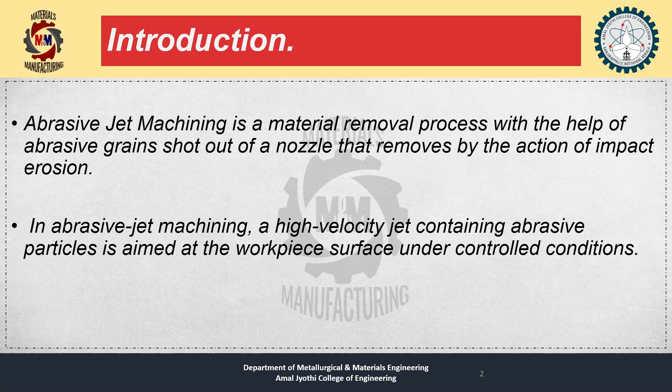What is abrasive jet machining? Basically, abrasive jet machining consists of shooting out abrasive particles at very high speeds at the surface we desire to carve, called the workpiece. It's a material removal process with the help of abrasive grains shot out of a nozzle that removes material by impact erosion. A high-velocity jet containing abrasive particles is aimed at the workpiece surface under controlled conditions. The environment is secured and closed so the spray doesn't go out of control, and the jet carves out the predefined shape we want.

The impact of the particles imparts a concentrated force performs operations to cut through the workpiece at speeds of 150 to 300 meters per second. The average speed at which particles hit the workpiece ranges from 150 to 300 meters per second, depending on the application used. The abrasive grits are carried in a high-velocity gas stream.

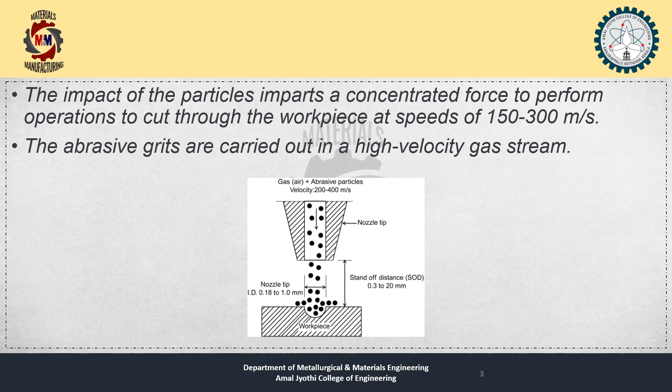To propel these particles through the jet, we use a gas stream, which I will talk about later in the components section. From the diagram here, you can see the nozzle tip shooting particles into the workpiece, and the particles have already made a semicircle-shaped dent on the workpiece.

Components of an abrasive jet machine: We have a gas supply, used to shoot out these particles and propel them at high speeds. A filter, used to make sure the fuel is completely clean. A pressure gauge, to monitor the pressure at which the gas propels the particles out. A mixing chamber, where the grits or supply we're injecting get mixed before being shot at the workpiece. A nozzle, where the grits come out directly. And an abrasive, the material we put into the machine.

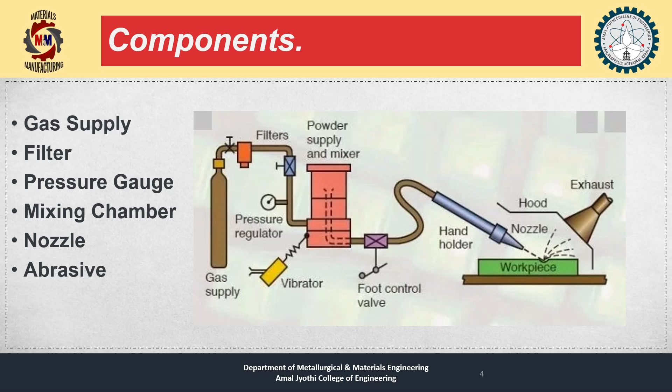Gas supply: this can be either nitrogen or carbon dioxide, and it's used to propel the particles out. A mixture of the gas and abrasive particles is aimed at the workpiece under controlled conditions, meaning the environment is closed with no chance for particles to escape. The gas is shot out at a pressure of around 2 to 8 kilopascals.

The filter is used to clean the fuel supply so that dirt or other impurities do not hamper the progress of the process. We want the process to be as neat as possible with minimal impurities so that it's more efficient.

The pressure gauge is used to control the pressure of the compressed gas used in abrasive jet machining, as the pressure decides the depth of cutting and the amount of force required for cutting. A tougher particle would require more force, and we can regulate this using a pressure gauge.

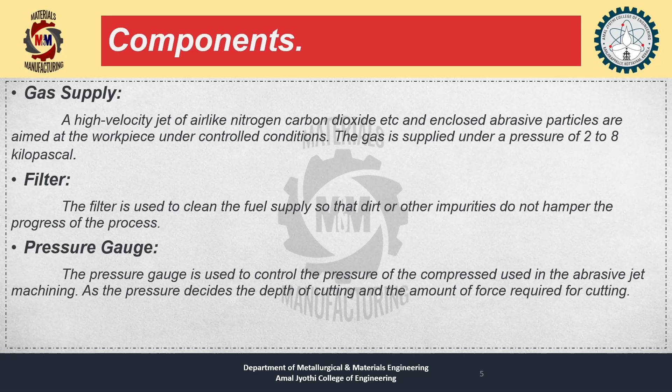Mixing chamber: the abrasive powder is fed in, and with the help of a vibrator, the amount of abrasives can be controlled. We want the abrasives and gas to mix thoroughly in this chamber, and we assist this mixing process using an external vibrator.

Nozzle: a nozzle is used to increase the velocity of the jet. The velocity can be anywhere between 100 and 300 meters per second, as discussed earlier. The nozzle can be adjusted for the desired cutting angle. For example, if we have a rectangular piece and want to make a 45-degree angle across it, the nozzle would be adjusted before cutting so the abrasives are shot at that particular angle to achieve the desired end product.

The nozzle is usually made of tungsten carbide since it is subjected to a high degree of wear. The abrasives being shot out do a lot of damage to the nozzle, so the components used to build it have to be resistant to this kind of wear and able to withstand corrosion.

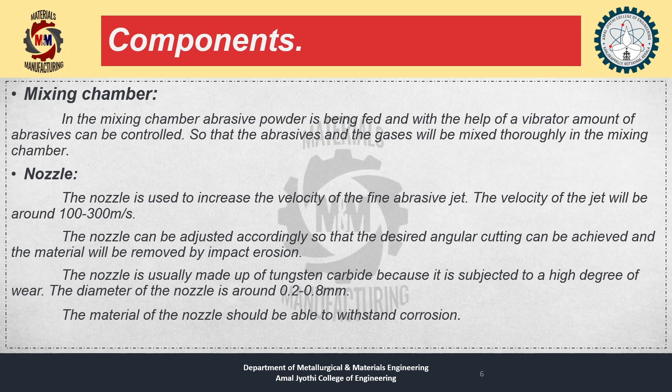Abrasives: the material we put into our abrasive jet machine to be shot out is basically divided into three main categories, which are aluminum oxide, silicon carbide, and glass beads.

The rate at which these abrasives can be fed is controlled by the vibration of the external vibrator we are connecting. The amplitude that it provides defines the feed rate of the abrasive powder.

The common particle sizes for these abrasives vary from 10 microns to 50 microns. Smaller sizes are used for better surface finish and precision work. More intricate patterns and details can be achieved using smaller pieces, while bigger pieces that do not require as much intricacy can be used for other purposes.

The feed rate of the abrasive powder is controlled by the amplitude of vibration of the mixing chamber. The external vibrator that we connect to the AJM, or abrasive jet machine, controls the feed rate of the abrasive powder that we have inserted into the machine. The gas pressure can be controlled using a pressure regulator.

There are three main categories of abrasives that we usually put into the machine. They are divided into aluminum oxide, silicon carbide, and glass beads.

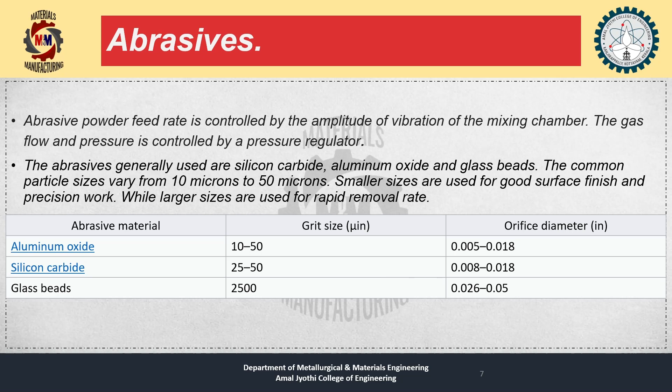The working principle of an abrasive jet machine involves the use of a high velocity stream of abrasive particles carried by high pressure gas through a nozzle onto the workpiece. The pressure energy of the stream is converted into kinetic energy, producing the high velocity stream.

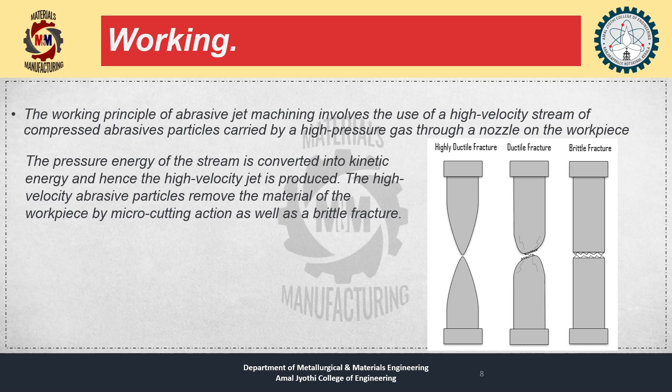These abrasive particles remove material from the workpiece by micro-cutting action as well as brittle fracture. We can observe different kinds of fractures, mostly two: highly ductile fracture and ductile fracture are quite similar to each other. Brittle fracture is not very clean and happens due to a rapid, quick movement, while ductile fractures tend to take more time and occur gradually. This also relates to yield, which is how ductile fractures occur, while brittle fractures are what we are causing here with these abrasive particles.

We can watch a live demonstration of the AJM in this video, and I'll be showing it to you right now.

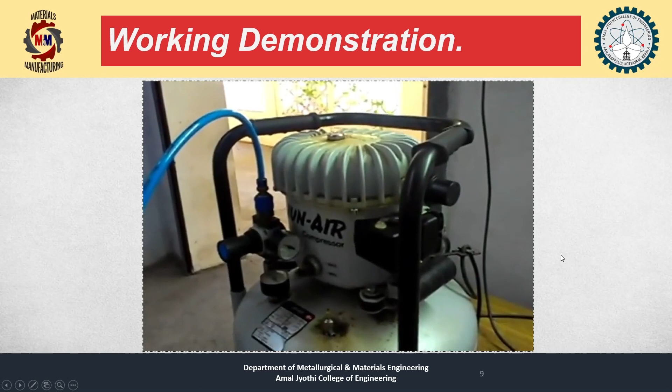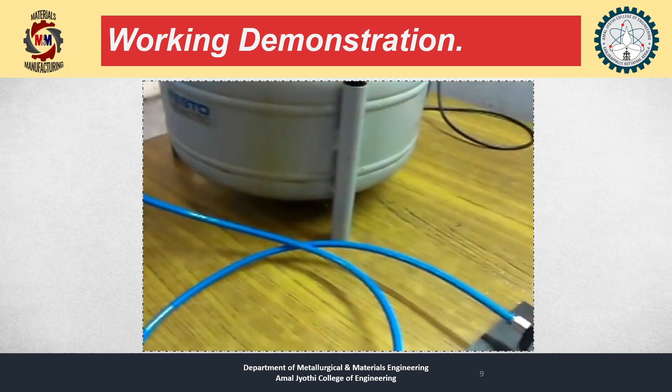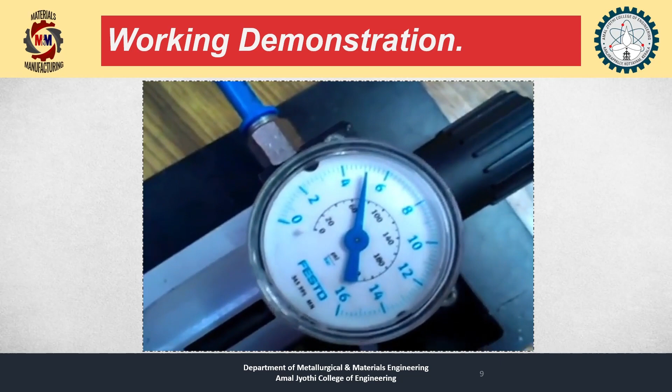This is the gas supply of the machine, connected and ready to use. The pipe connects it to the nozzle at the end to shoot the material out. In between, you can see the gas regulator, or pressure gauge, which allows us to control the pressure we want our nozzle to shoot out at.

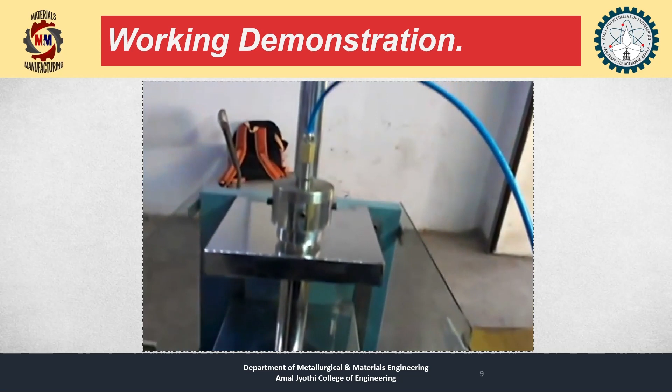This is the control surface. The glass panes on the side act as a controlled environment.

They are setting the machine up for doing some abrasive jet machining.

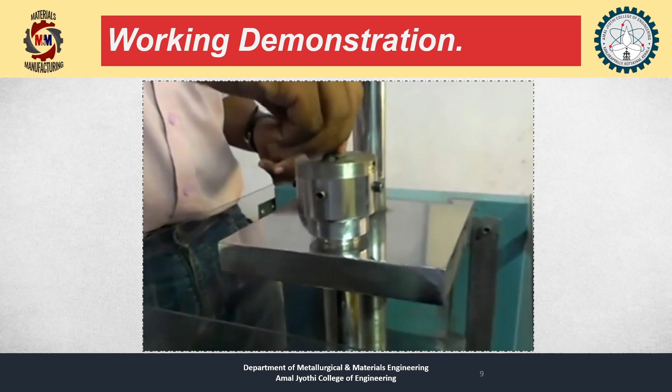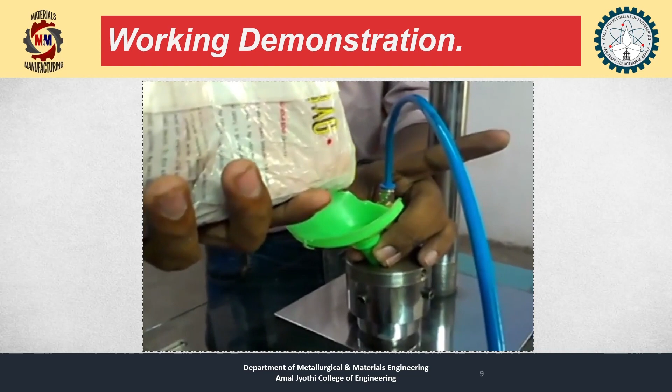Grit is being fed into the machine's mixing chamber using this small funnel. This is obviously grit that is very small in size, so we can confirm it's between 10 to 50 microns.

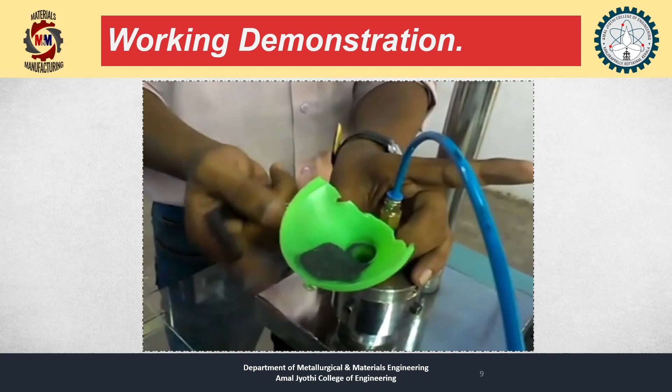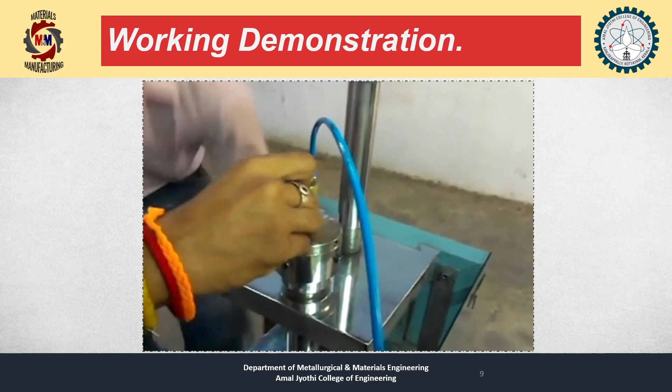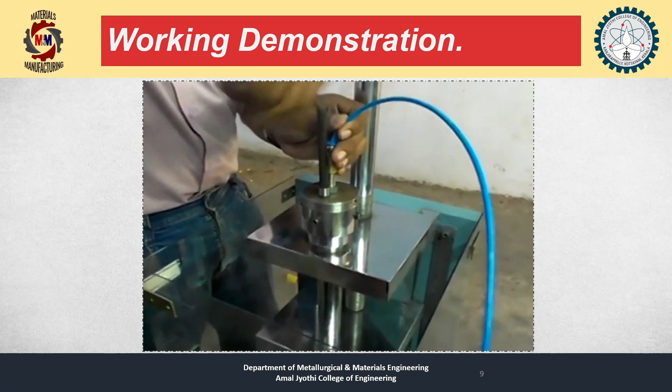Once the grit is fed into the mixing chamber, a key is used to tighten it so that none of the material can shoot outwards.

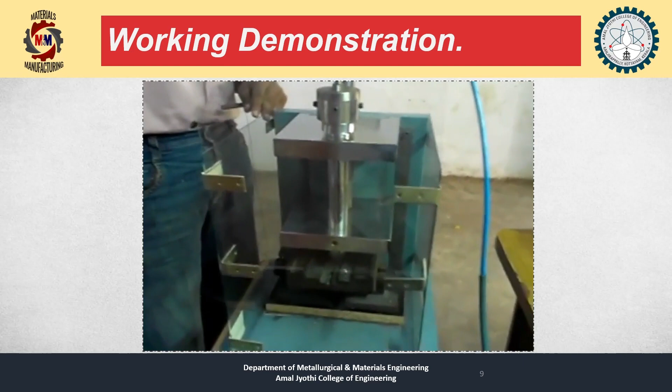The glass piece is removed so that they can place the workpiece inside of the machine. The workpiece is what we will be witnessing the action happening on today.

Now the environment is completely closed, so there is no chance for any of the grit to escape this closed environment.

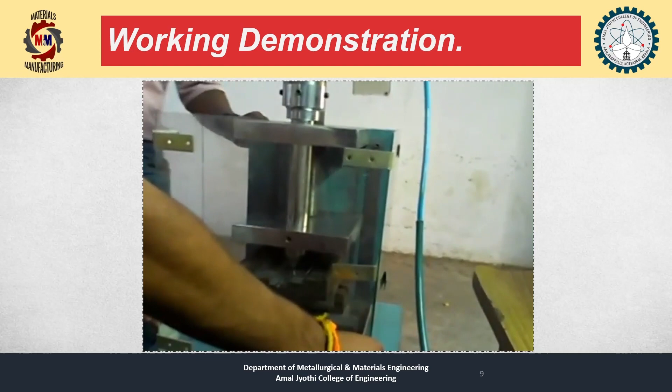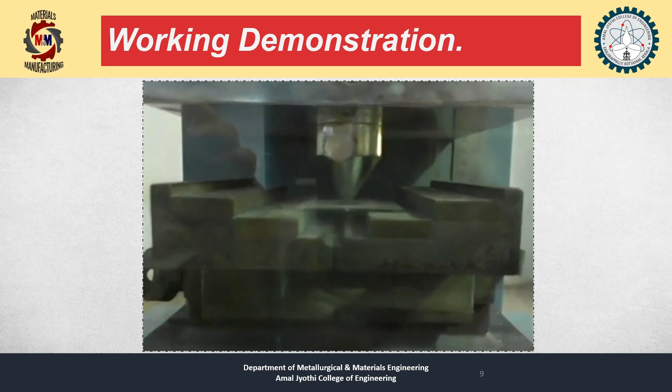The distance between the nozzle and the workpiece is very minimal, so that corrosion on the nozzle is minimal and the effects are more efficient.

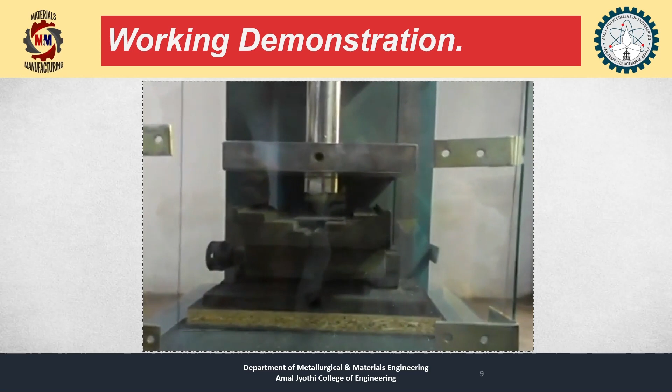As we can see, the grit has been coming out of the nozzle, and we can observe the effects of this grit on the piece of glass placed there. On removing the glass piece, we can observe the effect the grit has had on it.

It appears to have made a fine hole through the glass. The size of the hole is directly dependent on the type of abrasive we have used inside the machine, and it seems to be quite fine, so it's used for that precision work.

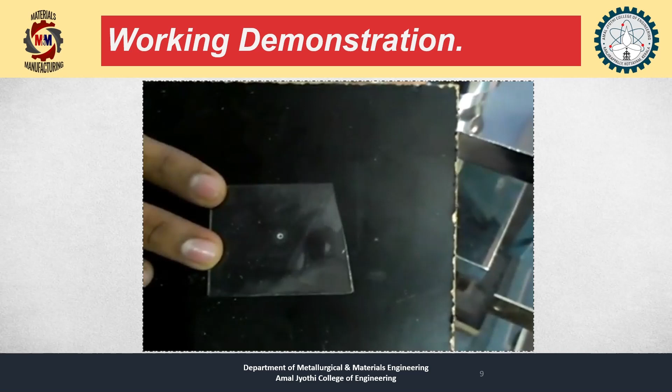A high surface finish can be obtained when we use abrasive jet machining, which means the particles are so fine that the surface we're using it on can have such a clean finish.

It provides cool cutting action for glass and ceramics, so it can machine delicate and heat sensitive material. In case we are dealing with material that is quite sensitive to heat, this method is more useful since it does not produce as much heat as other methods. Materials that are heat sensitive can be quite easily worked on here.

The process is free from chatter and vibration as there is no contact between the tool and the workpiece. In other machines, like a lathe, that use direct contact to cut material, external vibrations could affect how the machine works. But in this process, there is a distinguished gap between the nozzle and the workpiece, which ensures there is no vibration that can affect the process.

The capital cost of an abrasive jet machining process is quite low, as the materials required are not too expensive and are quite readily available.

Intricate shape holes of brittle materials can be machined. Small patterns and extremely precise work can be achieved using the machine.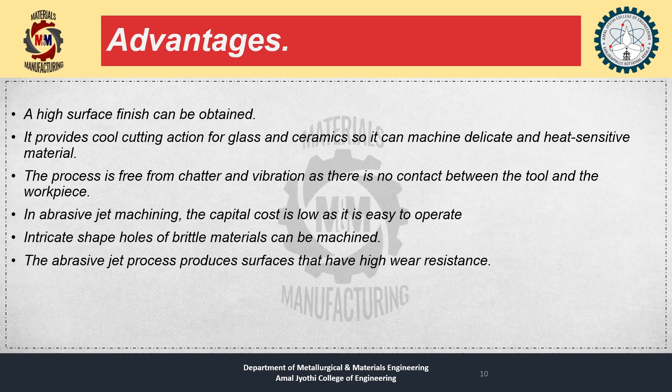Moving on to the disadvantages: less capacity of the process due to low material removal rate. The process takes quite a while as it requires a lot of time to remove material slowly.

While machining soft material, abrasive gets embedded, which will decrease its surface finish. During the process of abrasion, tiny grit particles from the machine can get stuck into the surface finish, which will obviously be a problem to the final surface finish of the product.

A dust collection system is a basic requirement to prevent atmospheric pollution. The dust produced by the whole abrasion process can be quite bothersome, especially due to the nature of the grit, and there needs to be a system in place to prevent this dust from getting out of control, which requires a closed environment at all times.

Nozzle life is limited to 300 hours. Due to the nature of the abrasive action happening on the tip of the nozzle, it cannot go on without replacement. It needs to be replaced every 300 hours, or else the final product results will be quite incompetent.

The process accuracy is poor because of the flaring effect of the abrasive jet. While projecting these particles out from the nozzle, the longer the distance between the nozzle and the workpiece, the more the grit tends to flare out, meaning it moves further from its original position. This might decrease its accuracy, as it might not give us the exact same fine cut we want and might spread out to other areas.

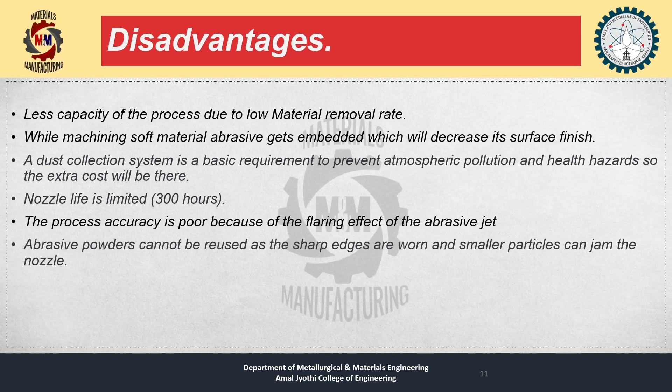Applications: it's used for frosting glass, ceramics, and refractories, and it is more economical compared to etching or grinding. It is also quite easy to use, as observed earlier.

Cleaning or layering of metals, like resistive coating. It is quite easy to spray this material on a surface and clear out these layers that have built up on it.

It can be used for cutting thin components such as germanium, silicon, quartz, and mica, and for cleaning surfaces from corrosion, paints, glues, and other contaminants. When these abrasives are shot at a surface with impurities, paint, or glue, it can easily be removed using impact erosion.